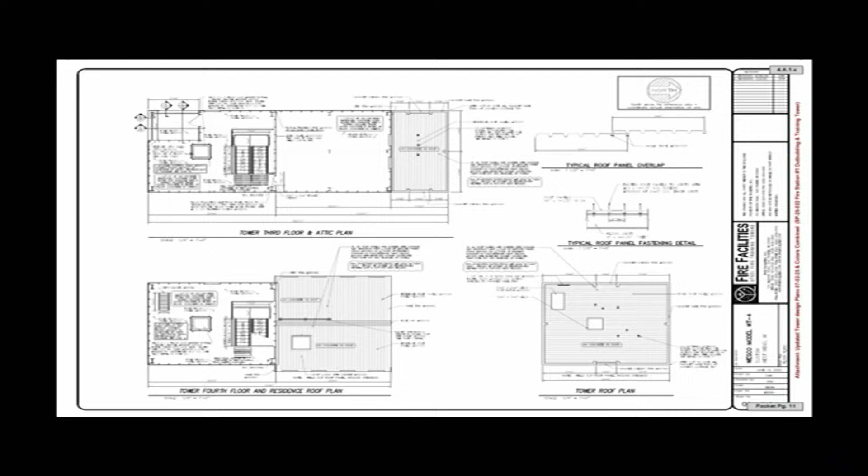The accessory buildings themselves will be a 42 by 72 cold storage building located on the eastern edge of the property, just south of the main building. And then the training tower is directly south of that, which is a 22 by 72 building.

The materials for the training tower will be slate gray metal panel building, and then the door trims will be bronze. And then also for the cold storage building, it's going to be a metal building with a black roof and a desert colored panel, which is kind of a khaki beige color for that. Staff would recommend approval of the site plan with no additional conditions.

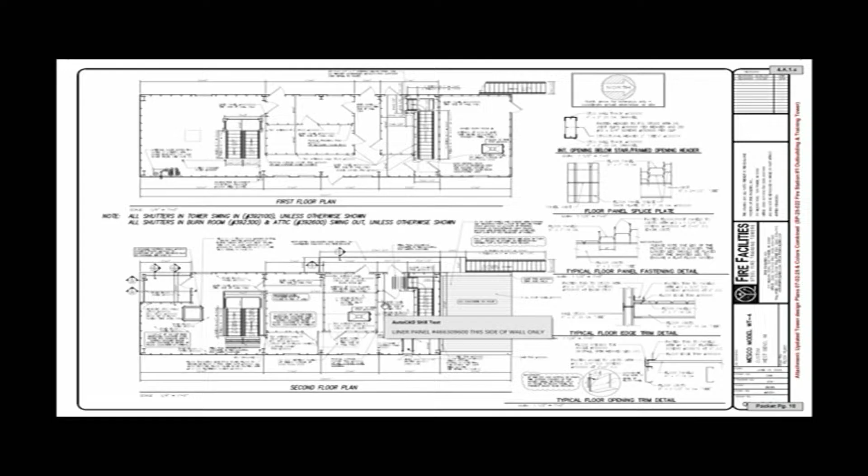No, not really. Good evening, everybody. Thanks for walking me through everything, guys. We're trying to get the building to look as close to the main building as possible, and there's so many different vendors, it's really hard to do that. But that is the goal, and that's what we're striving to do.

Do you know if Cleary is building this, or there were two, it was Cleary and Walters. Walters, yeah. Walters was awarded the bid. Yeah, we need a motion, yes.

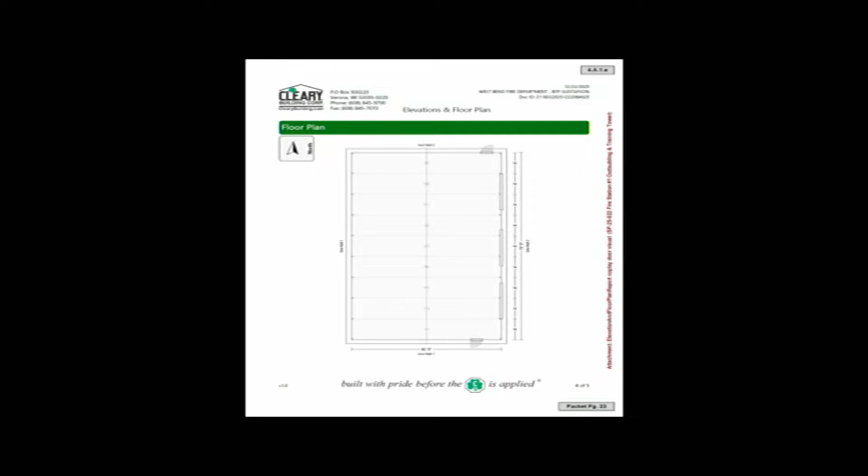Bill, I've got a clarifying question. Looking at page 7 in the packet, the subject says review the site plan for a 60,624 square foot cold storage building. For the record, is that correct? No, I think that's a typo. Okay, all right, sorry. John did announce 6,000. Yeah, okay, he did announce 6,000.

42 by 72, right? Did I say 6? Oh well, but I noticed it wrong too, because I saw the 60 and I was like, that's a typo then, heavy fingers there. Unless you'd like us to build a bigger one, I think we're good. Is the square footage 6,624? Does that sound right? That sounds about right. Yeah, 42 by 72, right? Yeah, 3,020.

I was afraid it's going to be as big as a fire station.

Good question. All right, I will entertain a motion on the site plan, please. Second. Thank you, John and Mike. Any more questions, comments, discussion?

I'll just ask one question because you mentioned the intent is to make everything match up with the building, but the tower... One of the, the cold storage building is a desert tan, but the tower is a slate gray, and there is a desert tan available.

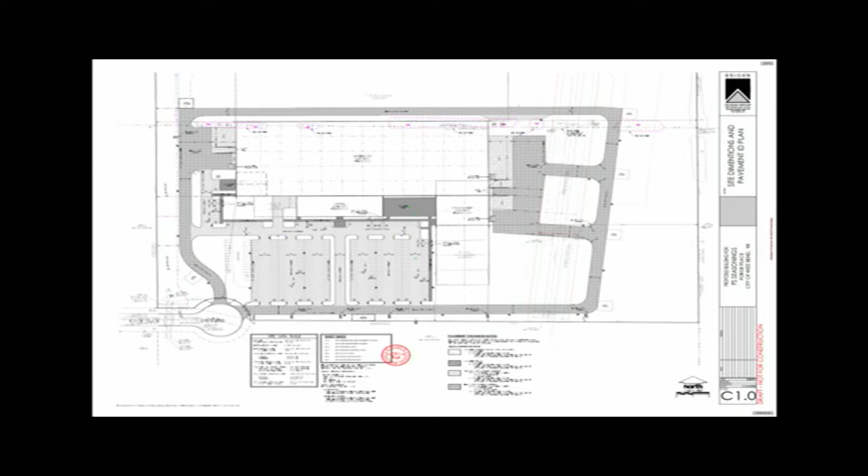Site lighting throughout the development will be LED lighting on 22-foot poles, which complies with the requirements of the zoning code. The architectural building elevations identify the majority of the building being a tilt-up precast concrete panel.

The panels will vary from exposed aggregate walls and also with reveals in the panels themselves, and they also have honed stone areas on the panels.

The colors will vary from a natural unpainted color panel all the way to various shades of gray, which they're calling Big Chill, a light gray, Chelsea gray, a medium gray, and Gauntlet gray, a darker gray. They also have red accents throughout the front of the building.

Staff would recommend approval with the listed conditions. There's a motion to approve. Is there a second?

John Swartz? Devin, and I apologize, I don't know your colleague, but if there's anything else you'd like to share, we'd love to hear it. This is very exciting for us, so thanks for being here tonight.

Hi, I'm Devin Pittman with the Briohn Building. Paul Greshek, architect with Briohn. We're just here to answer questions if you have any. We've done a lot of work with John and Max and the rest of the team, so we're confident that they have put all the input that they need to into the project.

Wonderful. Any questions? Jed? It's a beautiful building that we're seeing here. I was just curious for Max, is a traffic impact analysis routine for this use? I don't recall.

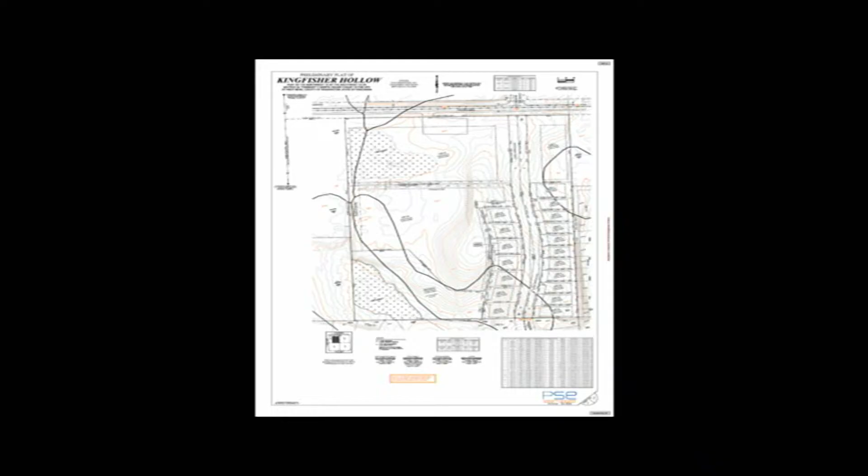All right, seeing none, all in favor, please signify by saying aye. Aye. Any opposed? That motion carries.

Our last item tonight is a concept plan. This evening we have a concept plan for discussion of a 72.3 acre plan for mixed residential development, which would in the future include a land use and zoning change from single family residential to single family residential, 2-family residential, and multifamily residential with corresponding zoning.

This is in TID number 18. We have been working with the developer throughout the summer and fall on this particular project. He's at the point where, with the concept plan, we felt it was appropriate to bring it to Planning Commission to have you guys provide a little bit of feedback.

I'll go through the plan in a little more detail. The property was annexed in July of this past year, 2025. It has been zoned RS4, and it does coordinate with the 2020 comprehensive plan. The proposal consists of single-family lots, 2-family ranch villas, and multifamily townhomes.

The single-family lots are predominantly on the western half, while the multifamily townhouses and ranch villas are on the east side. I should note that this is part of the developer's work with Washington County.

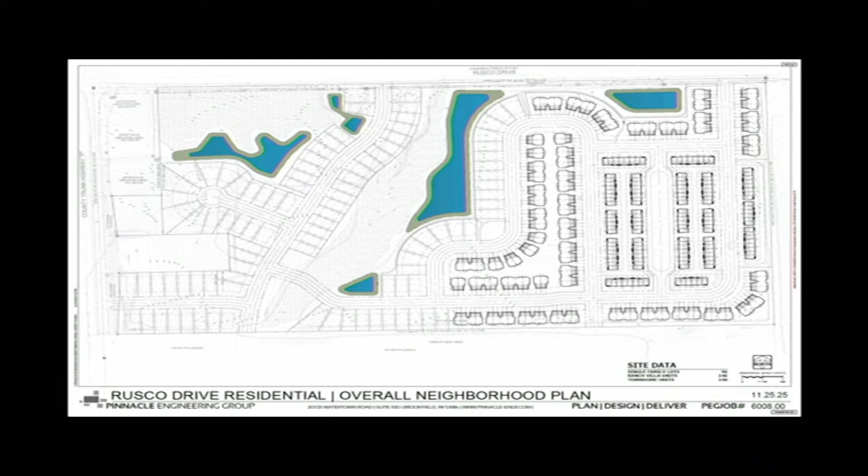And I think that's probably a quick summary. I'm going to turn it over to Scott right now. He has about a 5-minute presentation, and then after that it would be appropriate for more questions and details you might have.

Yeah. Thanks for being here tonight, Scott. Thank you, I appreciate it. I just wanted to get a chance to appear in front of you to introduce myself and show you some of the ideas of what we're trying to integrate here, along with a thank you for all the help you've been so far.

We're looking at, does everyone have a copy of my handout? We're going to put it on the screens right now. Tim is putting it up, and you should see it on the podium as well as the big monitors in a minute. Okay.

It's not coming up on here, but do you have it on the big screen? We can see the slide right now. Okay, it's not on here, but that's quite all right. I think our IT people are working on it. We can see it right here in front of us. Okay, is it on that screen, Gus? Okay, it's up over there.

If you want to go on to the second page. Okay, this is just an introduction of who I am and what I've done. I've been doing this since 1992. We've developed over 1,000 single-family and multifamily homes.

I've done over 15 to 20 subdivisions. We've done all different things, and my education's on there as well, just because you don't know who I am. I thought I'd throw that all in there. If you want to go to the next slide.

This just continues on showing a couple of the projects that we have built in the past. It shows even one we're doing now, Pleasant Corners, with a larger 4-unit condominium on each section in a pinwheel style design. It's been going very well to date, but I wanted to show you some of that as well. The next slide will show you a couple of larger mixed-use residential projects that we've done.

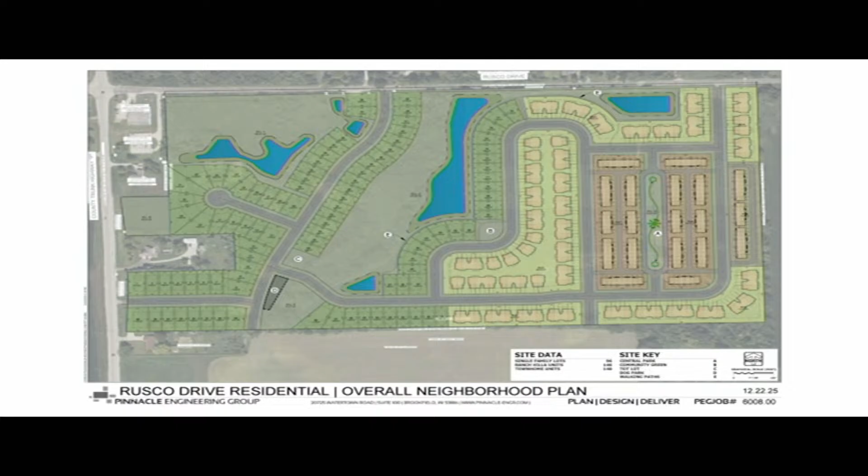I just want to ask a clarifying question as it relates to having a homeowners association, particularly as it relates to the 5 park areas. I want to be crystal clear that those will be managed and maintained as part of the association, not as City of West Bend parks, correct? That is correct. Okay, thank you.

There would still be park impact fees. Correct, park impact fees are in lieu of parks. So if in our outdoor recreation plan we identified a park or parkway in this particular area, what we would be asking is the developer deed that piece of area to the city for our park system rather than paying the impact fee. Our comprehensive outdoor rec plan does not acknowledge any park, parkway, or trail system on this particular property, so it would just be park impact fees from that perspective.

This would be a great opportunity to mention that with this rezoning you're going to see in the next few months, you'll see the rezoning to RD2 as well as RM, but you'll also see an application for a planned unit development over the whole property. With that, there'll be some relief on some of the lots. Our standard RS4 subdivision has a 60-foot lot, but in some cases on this particular plat, they'd be 50-foot lots instead of 60.

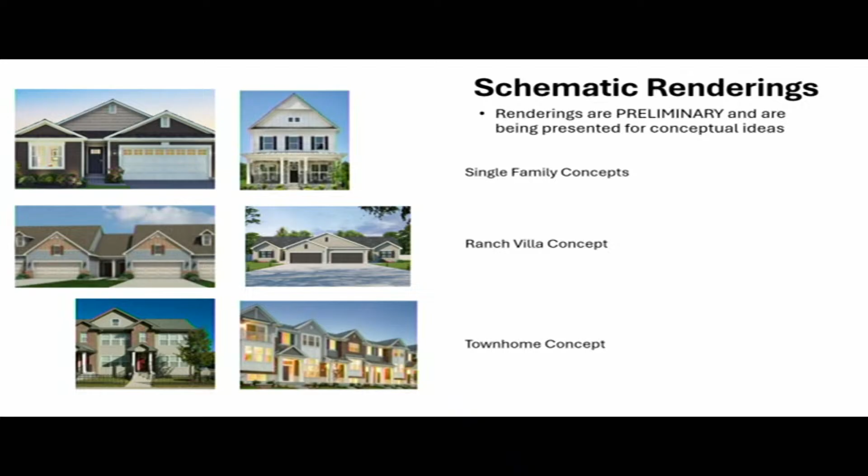You're right - if you look at the bottom one, the first unit has a punched-out square bay with a balcony on the top floor and a gabled entrance door. The next one's more flat with a shed roof. The next one again has a shed roof, but the living space has a bay window. So it's little things, and then they change the material. That's pretty common with single family type townhouses, gives that diversity, very complimentary. My architect and I have been discussing whether to use different colors and color schemes between buildings, which you've now given me direction on. I hope there's other heads nodding - it'll look much more interesting than the same thing next door to each other.

Any other thoughts? Again, another exciting development for us, a community of 382 units - we haven't had one of those in a long time. So thank you for your work with our team, John and Jim and the gang, and thanks for being here tonight. Thank you, I appreciate your time.